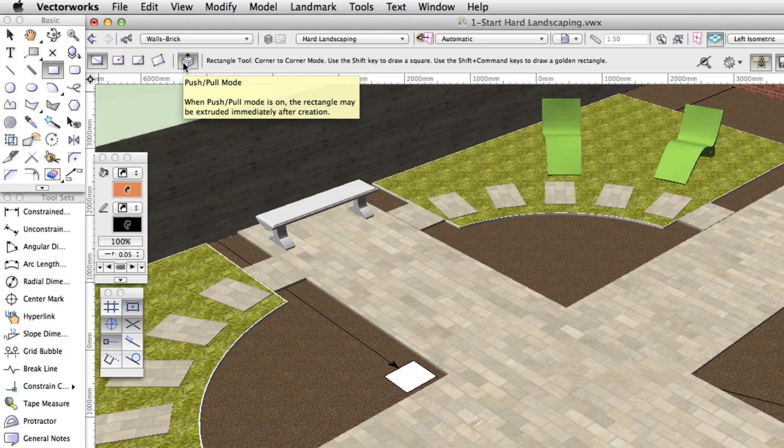Choose the rectangle tool from the basic palette, and on the toolbar choose the first mode. Note the push-pull mode, which displays when you use 2D tools in a 3D view. This mode should be on by default, but if it's not, turn it on. Trace over the existing rectangle by clicking on one corner and then on the diagonally opposite corner. Immediately move the cursor onto the face of the rectangle. It will highlight in red. Click on the face and move the cursor up to push-pull the rectangle into an extrude.

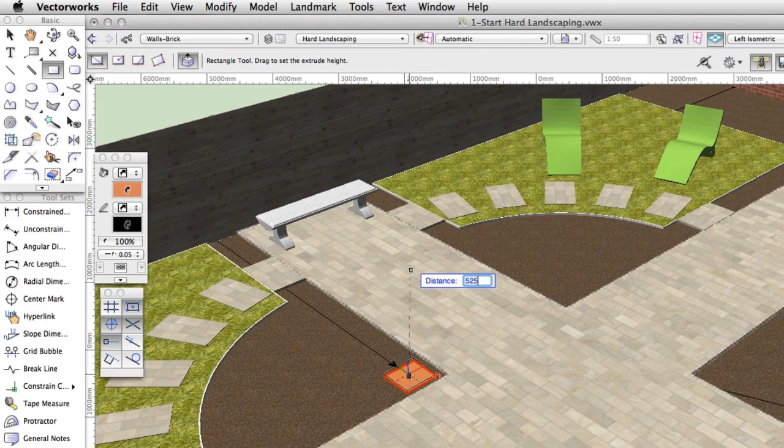Press the Tab key and in the data bar type 525 and then press Enter on your keyboard. Then click to complete the extrude.

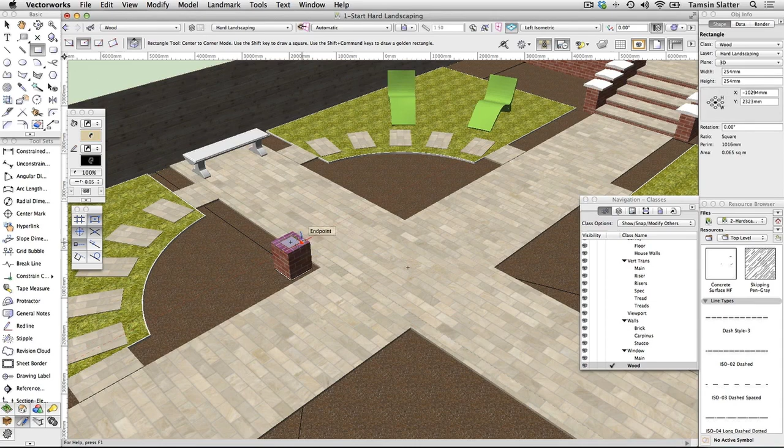Make wood the active class using either the View menu, the Classes button on the View bar, or the navigation palette. On the toolbar, change the mode to Centre to Corner mode. Move the cursor onto the top of the pillar and watch for the surface plane to be acquired. Draw another rectangle in the centre with Centre to Corner mode, slightly smaller than the original. After the second click, on the Object Info palette, refine the size. Set the width to 150 mm and the height to 150 mm.

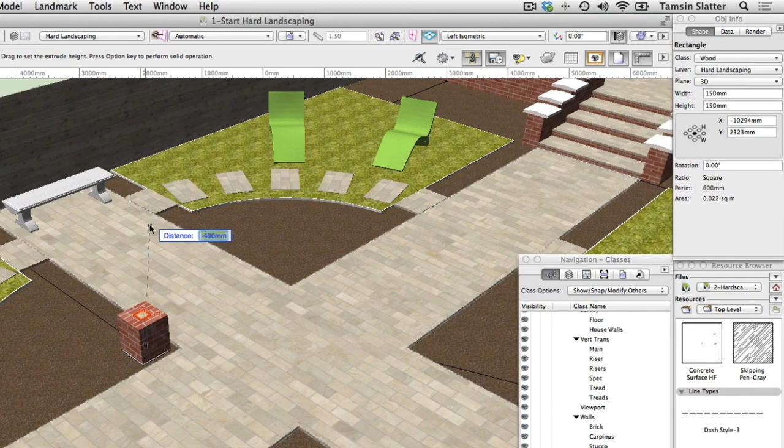Immediately click on the surface of the rectangle and press Tab in the data bar. Type 2475, press Enter and then click to complete this second extrude.

Mirror the pillar and post. Click the Selection tool and hold down the Shift key. Select both the brick base and the post. Choose the Mirror tool and mirror the pillar through the centre of the path.

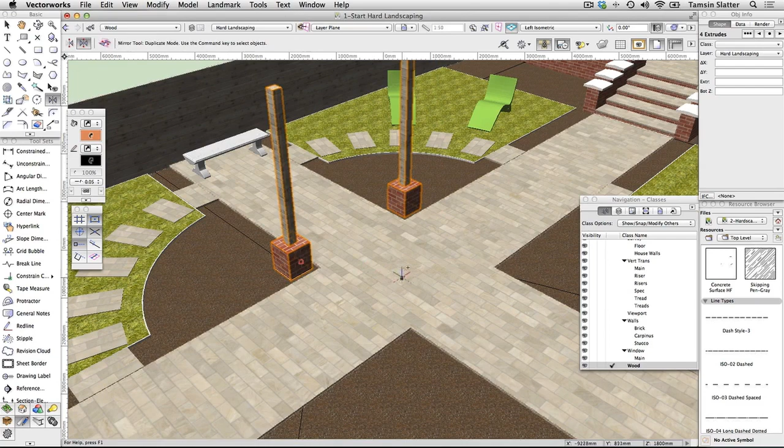Using the Selection tool, select both sets of pillars and posts. Then use the Mirror tool again to mirror through the centre of the path on the opposite axis. You'll now have 4 pillars around the centre of the paving. The textures set up in the walls, brick and wood classes have been applied because the extrudes have been created in this class. Remember that you will need Renderworks to be able to see textures.

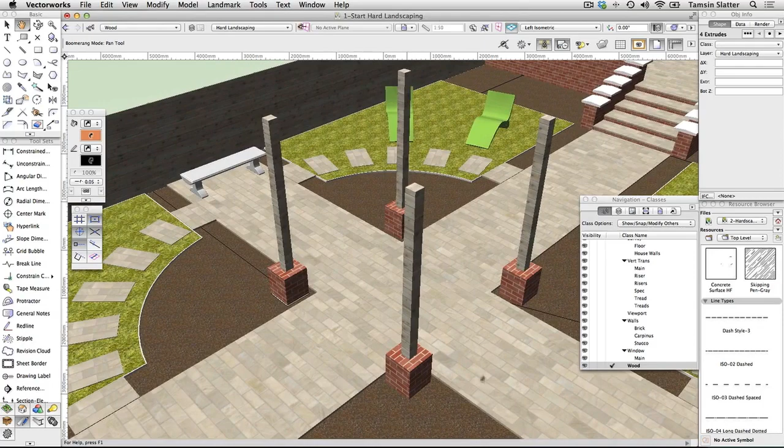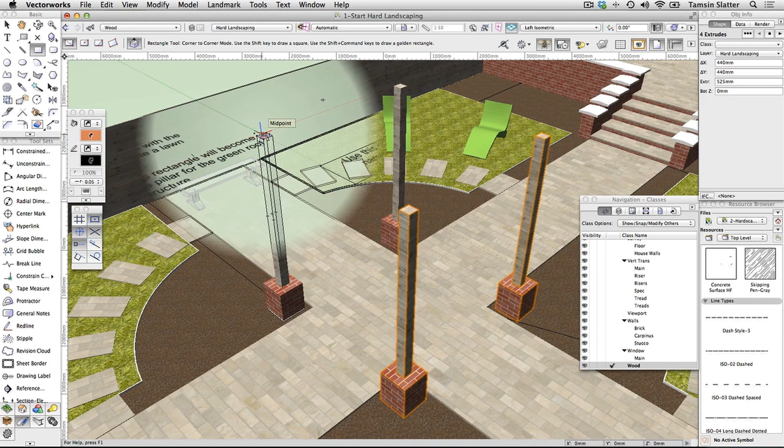Extrude the roof. Click the Rectangle tool on the basic palette. On the toolbar, click Corner to Corner mode. Hover the cursor over the top surface of the wooden posts on the leftmost post in the 3D view. Notice the automatic plane detection spring into action again, colouring the top surface red. Click on the outermost corner of the rectangle and then draw a rectangle that stretches across all 4 posts to form the base of the roof structure.

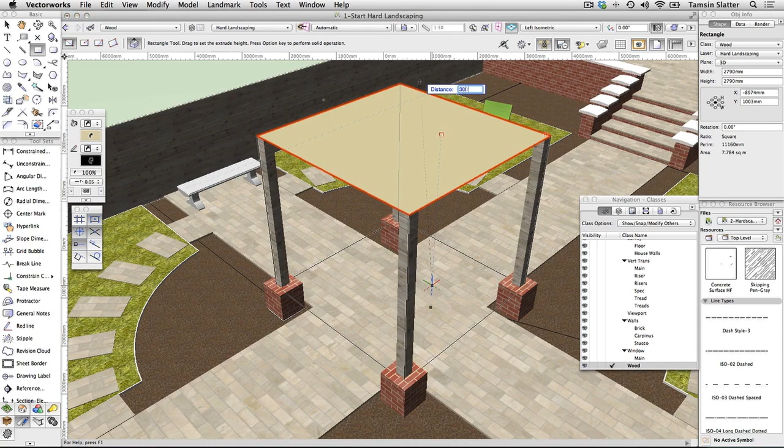Click on the surface of the new rectangle and pull the rectangle up. Press Tab and type 300 into the blue data bar and press Enter on your keyboard and then click to complete the extrude.

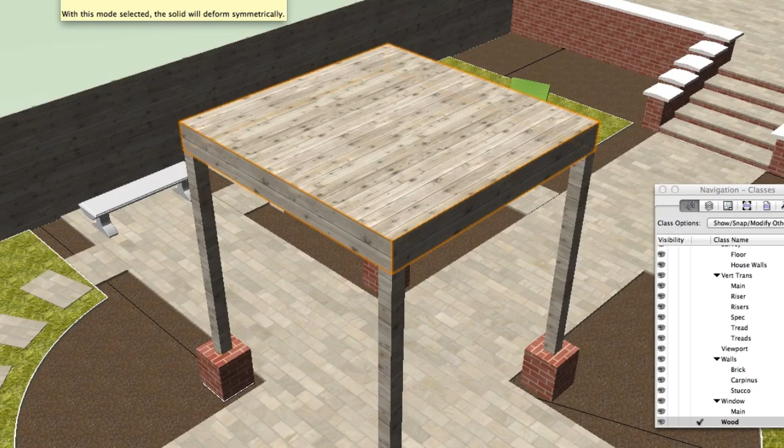Shape the planting structure. Click the 3D modelling toolset. Click the Deform tool. On the toolbar, click Taper Solid mode and then select Symmetric mode. Click on the roof structure and then click on the centre of the top surface. Click on one of the edges and start to move the top surface outward. Notice it tapering. Move the cursor down to the edge of the brick column base to snap to it. Click to complete the taper action.

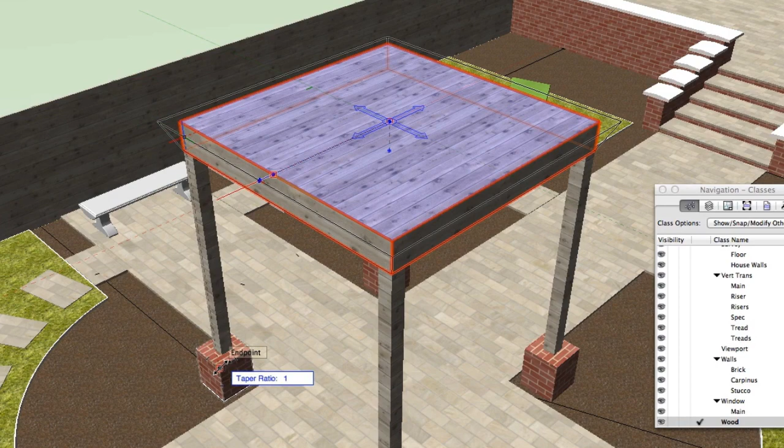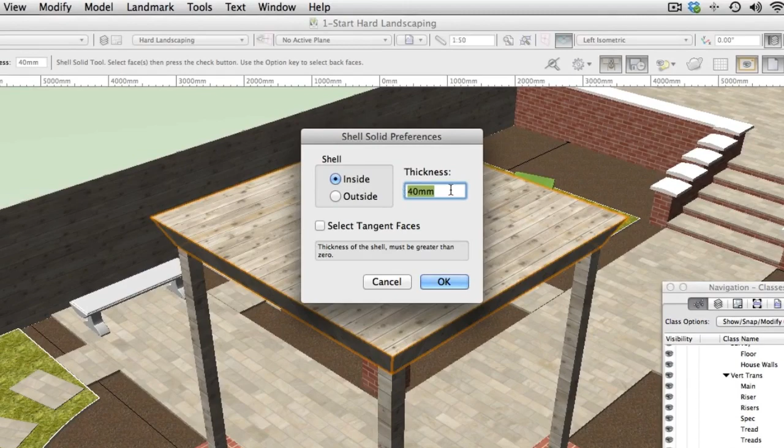Now we'll hollow out the structure so that our green roof planting can sit inside it. On the 3D modelling toolset, click the Shell Solid tool. On the toolbar, click Shell Solid Tool Preferences and change the following: Shell inside, thickness 40 mm. Click OK. Click on the top surface of the roof structure. It will highlight in red. Click the green tick tool on the toolbar or press Enter to complete the Shell Solid operation. Notice that the shape has been hollowed out to a thickness of 40 mm.

With the rooftop selected, click on the Object Info palette's Render tab. Scroll down until you find the Rotation field and type 90. Press Enter. The wood texture will rotate 90 degrees. Click the Shape tab. Change the view to Top Plan.

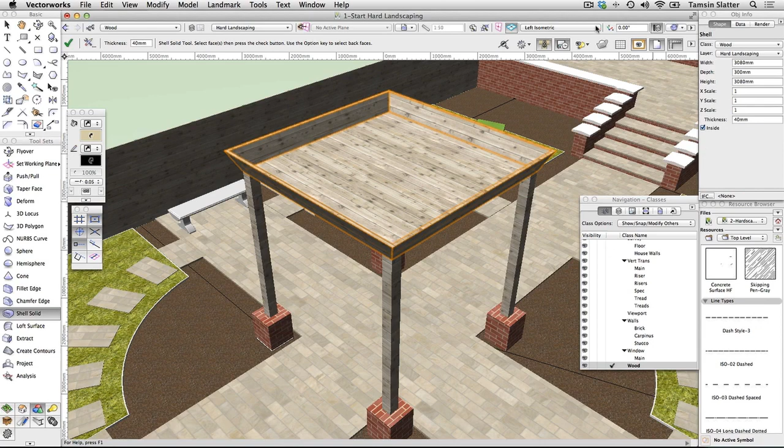Create the 2D plan view. The structure is complete in a 3D view, but in Top Plan it doesn't display any fills, unlike the other objects on this design layer, which are both 2D and 3D. Now you'll learn how a 2D plan view of a 3D model can be generated automatically.

On the Navigation palette, make Fixtures Main the active class. Click the Selection tool. Click and drag around the structure to select all of its elements. Choose Landmark, Architectural, Create Auto Hybrid. Notice that Vectorworks has created a 2D plan view of the structure. Currently, only the pillars of the structure are visible on the plan.

Notice on the Object Info palette that the cut plane is set at a height of 1000 mm, which is cutting straight through the pillars. On the Object Info palette, change Cut Plane to 3300, the overall height of the structure.

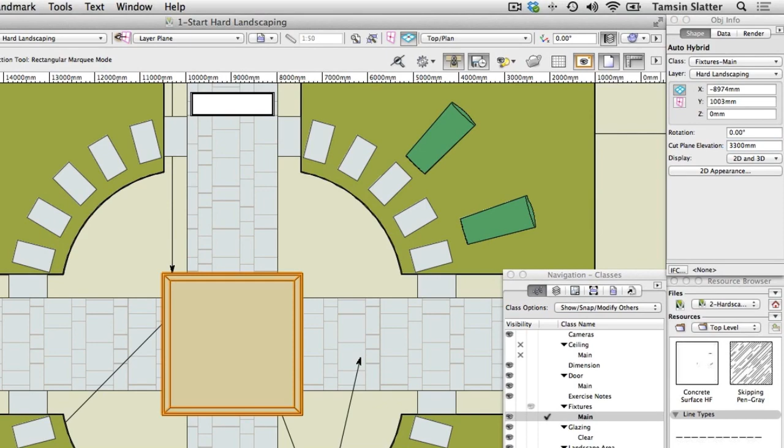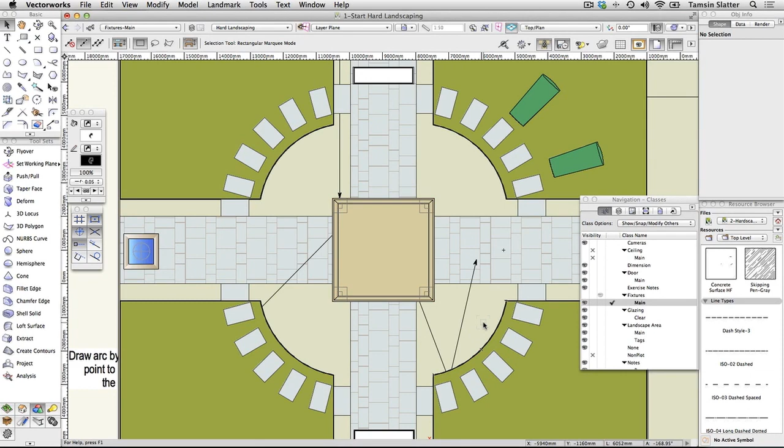Click 2D Appearance and change the following. Click the Below Cut Plane tab and check Dashed Hidden Line. The 2D display is updated to show the structure as it looks at the new cut plane height. Notice also that the cut plane displays in the colours of the original object, in this case derived from their classes. And you can also see the posts and pillars as a dashed line.